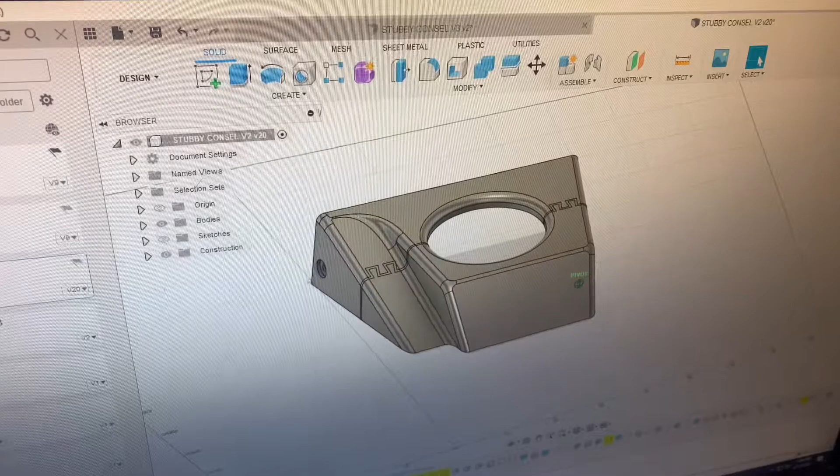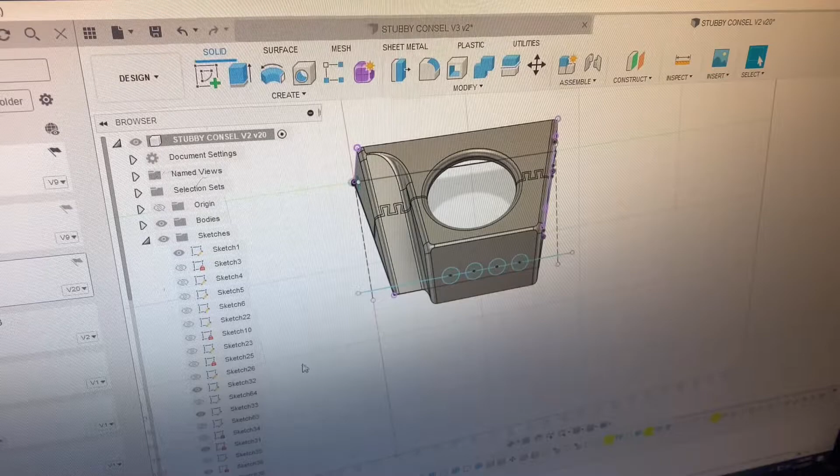So this is my design number one, and this is how the sketch started off. Now, a little bit of progress on it, about halfway through. Got the rough shape lined up, all the holes and everything, and made it all clean. This is Fusion 360, in case you guys are wondering. That's how I made it. And yeah, so that's the first design.

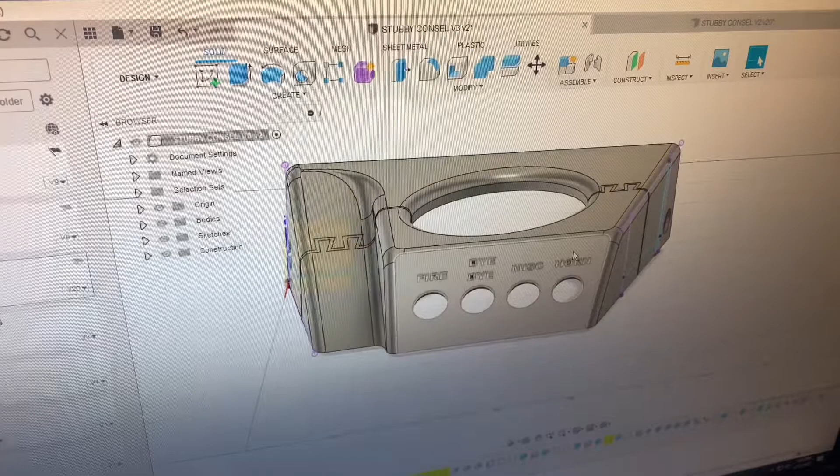I've gone and updated it to fit more my style. Now, as you can see, I made some fun little names for my switches. Fire for my launch control, bye-bye for my electronic boost controller. This one I don't have set up yet in my car, and this one I have set up as my horn. So I labeled these as I want them.

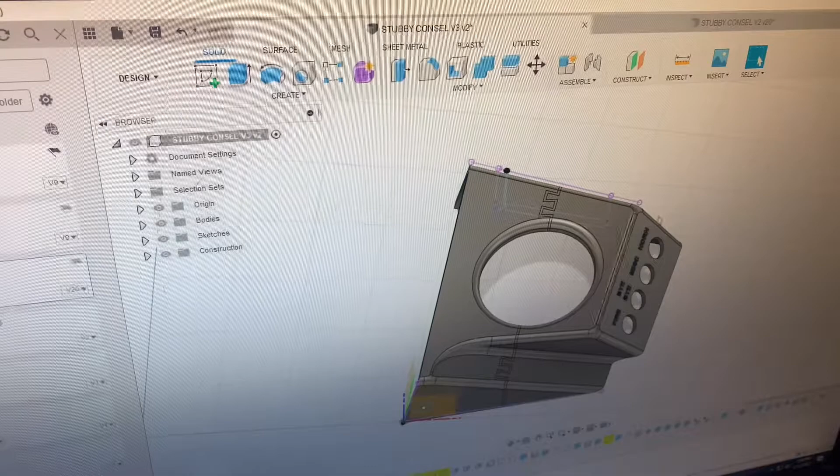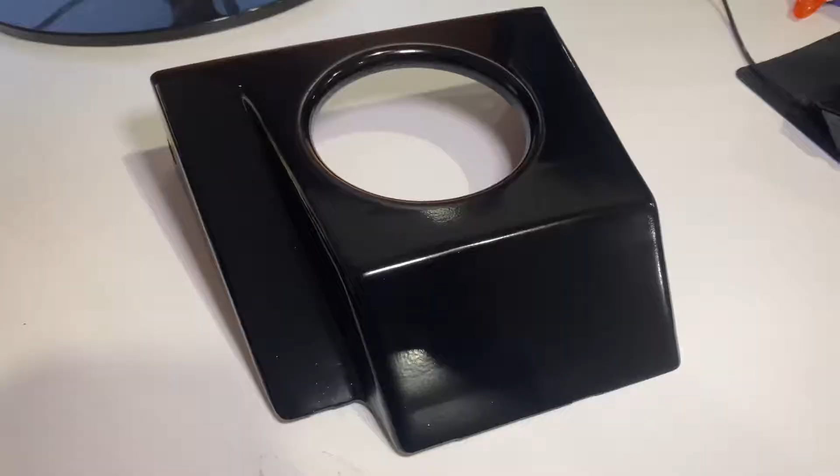So guys, this is version 1 right here. This is for you guys that don't want any of those holes, just need a simple, very simple Stubby Console. Everything lines up, shifts just fine. I'm gonna have an option, so if you guys want them sanded and primered like this one, to avoid the lines.

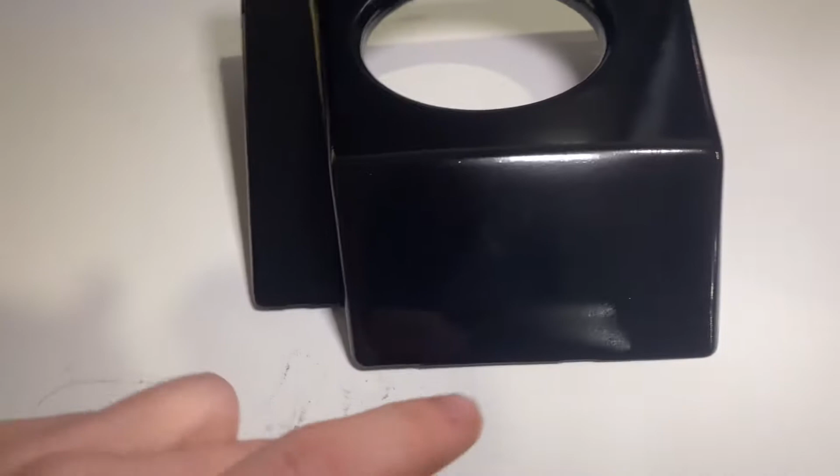Now this is an extreme example. This was one of my first tests, so I printed it too fast and at a weird layer height, and it just didn't like it. So that's why it tended to cause those lines a little more, and I can show you that on version number 2 or 3 actually.

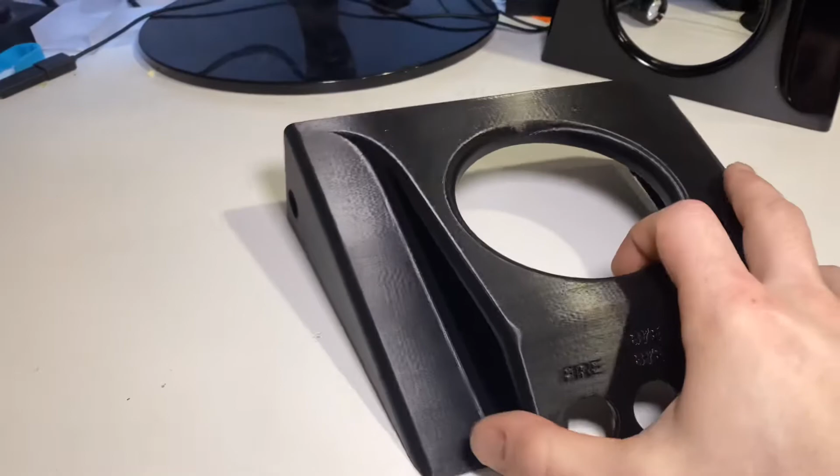Now you can see this hasn't been painted or anything, and very few lines. So from the bottom up, not so many, and the higher you get, the more it tends to wobble a bit. So you can see a little bit of the lines.

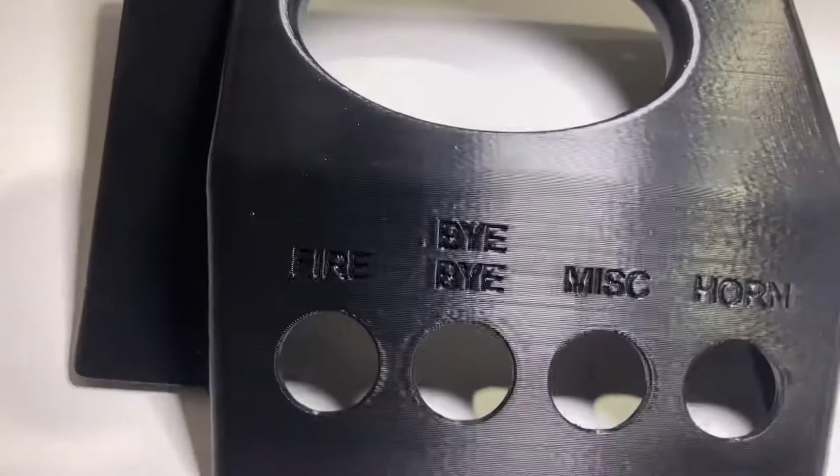But yeah, now this is how they turned out. I have gone ahead and made them thicker and slightly bigger so that it turns out a little nicer. I've also indented them more, so I've doubled the depth of them, and they're going to turn out much better in my next print. But this is going to be what I throw in my car.

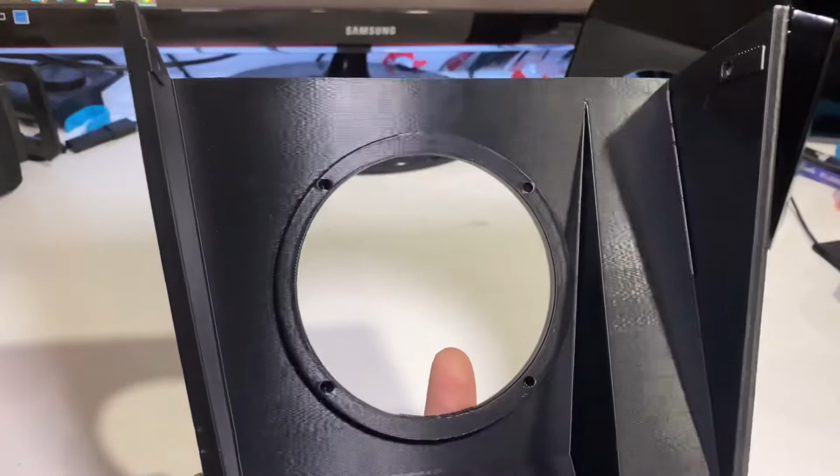Now the bottom has little holes for threaded inserts. They get installed using a soldering iron, and I can show you those in one second.

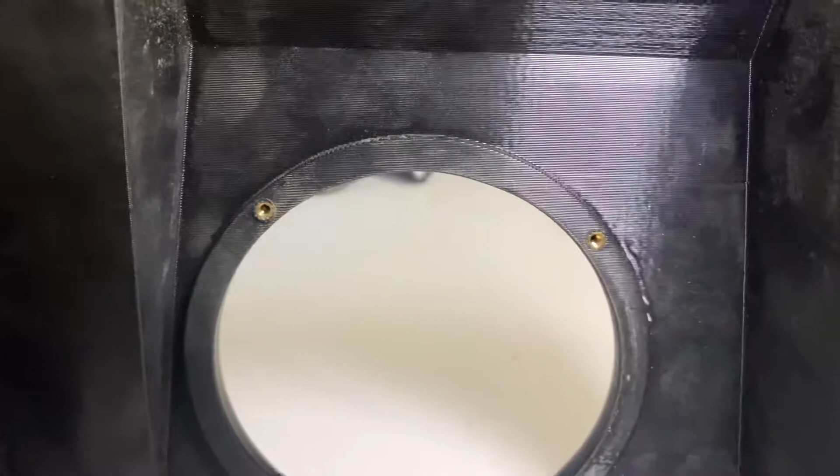So I'm not sure how well you can see that, but that is the threaded insert right there, and that's how they get installed. Now I'm going to be using a neoprene fabric, so like what they use in wetsuits, so it'll be a nice clean flush look. Even when you're shifting, it'll be nice and flat. It'll almost look like those old school plastic plates that stay flat when you shift.

These are 20mm holes, so you can fit any 20mm switch in there. I have just ordered them, I'll show you what I've ordered. These guys right here, just a very simple rocker switch. And for the horn, I'm going to do a momentary switch.

Now, I can leave these blank so you guys can put your own writing, or I can leave it like this. I will have options so you can choose from, but the writing will turn out a lot better. This is just, both of these are just drafts actually, so final product will be much cleaner.